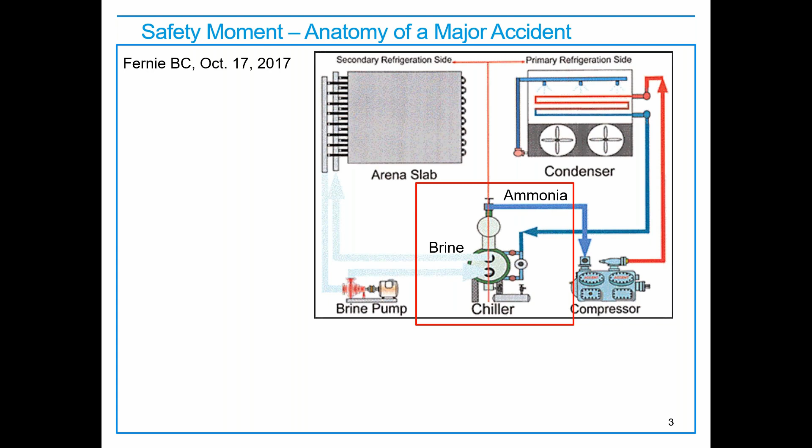So I wanted to start with a process safety moment, and I wanted to tackle this incident in particular that happened in BC in 2017 at a hockey arena. The incident happened in their chiller system, the system they use to cool the slab so the ice will stay and remain during the winter hockey season. Essentially what ended up happening was the tubes that contained the ammonia ended up leaking.

There was also a compromise in the brine tube, so the ammonia got into the brine. When they combined, it caused a bit of an overpressure, and then caused a much more significant release of ammonia into the mechanical maintenance room where the chiller system was located. There was enough ammonia that residents in the local area were smelling it and phoning police and fire departments. The arena did have an alarm for ammonia leaks in the maintenance room, and 3 arena workers did indeed go in and try to investigate the leak itself.

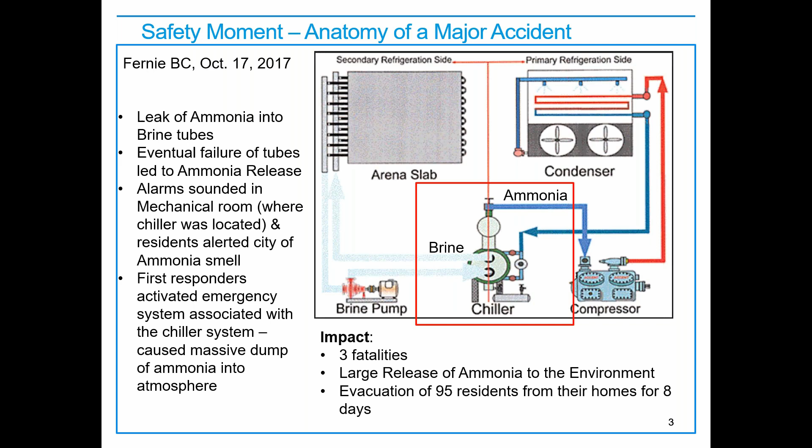First responders, when they arrived on site as a result of the phone calls from local residents, went into the mechanical room, quickly saw that there was a leak, and saw what looked like a press-here-in-case-of-emergency type button. They activated that button, and that actually led to worsening the situation — it dumped the rest of the ammonia out of the system and into the air. The net result of this incident was 3 fatalities. Unfortunately, the 3 arena workers who went in to respond to the alarm all succumbed. And there was so much ammonia in the environment that 95 residents had to be evacuated from their homes for 8 days. So very, very significant in terms of incident. But let's see what we can learn from it.

So the first thing I'm going to pull up here is just a visual of the Swiss cheese model — hopefully folks are somewhat familiar with it. Really, it just states that in order for a major accident like what we just witnessed at a facility to occur, it usually has to compromise multiple layers of protection. Some of those layers are technology barriers — protection systems, pipe thickness, your equipment and what condition it's in. Some are process barriers, such as how you go about maintaining and operating your assets. And some are people barriers — the knowledge, training, competency, and decision-making of the individuals in question. So let's examine this particular instance from that perspective.

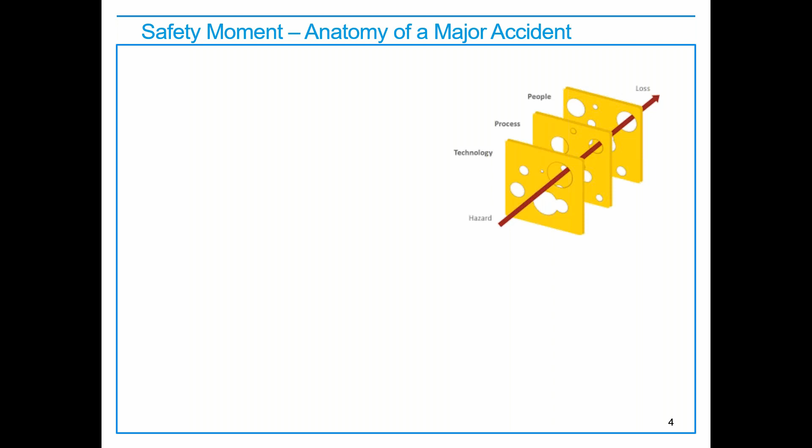So looking at it from a technology, plant and equipment standpoint, a few things came out in the investigation. The first thing was that right from day one, the design of the building's ventilation system was not adequate.

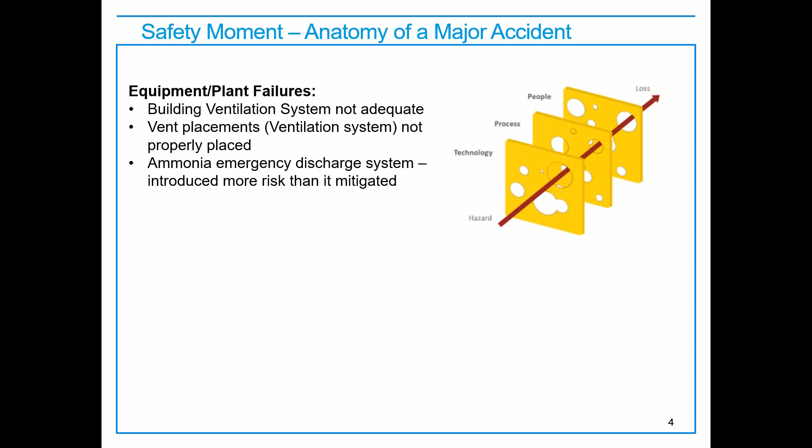So it would not have been able to expel adequate amounts of the ammonia in the case of a leak. The other unfortunate thing right at the design stage of the building was that the vent placements for the ventilation system were not appropriate. The vents that took air from inside the building and vented it out were right next to the intake, so the air would go out and then circulate right back into the building. In this case, the ammonia discharge system, the emergency system, actually did more to worsen the situation than to help contain or manage it.

From a process standpoint, the city had known that this chiller system was at its end of life. They'd been notified of that by maintenance contractors they brought in. They had actually gone in and allocated funding to replace the chillers, but that had been deferred a couple of times, and then it just simply stopped appearing in their long-range plans. It's not obvious why that came off or whether that was an oversight.

Secondly, there was no formal risk assessment process to support the decision making, either in terms of their capital planning and decisions to defer things, or in terms of the arena itself, which had identified the ammonia leak in the spring. They decided not to do anything about it, but to try to address it during major plant maintenance before the winter season started. They again identified that there was a leak and still chose to put the system in place. So again, decision-making challenges there.

And finally, lack of awareness and documentation of plant hazards. It was pretty clear that there weren't documented procedures for what to do in case of ammonia leaks, and the individuals working at the arena didn't necessarily recognize or understand the hazards associated with that and how to properly respond. So that leads to people failures - there was a lack of competency, training, and knowledge on the part of the people involved, and that led to poor decisions, both from an asset investment standpoint and from a return to service standpoint given the equipment's condition.

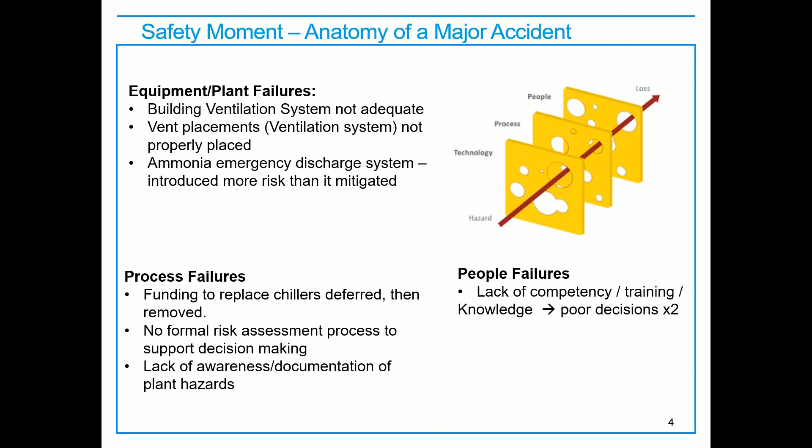So process safety - the reason we embark on these types of journeys and improvements is exactly to avoid these types of scenarios and circumstances that can unfortunately happen.

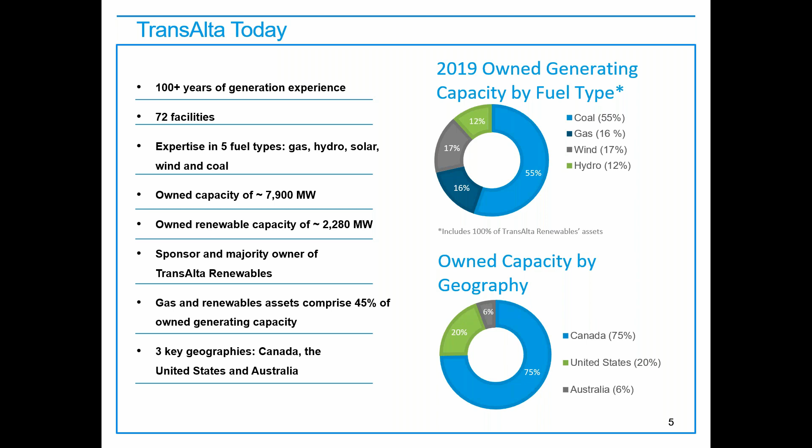So before I go into our journey, I wanted to introduce you a little bit to TransAlta to give you some context as to who we are. We are a power generation company - we have coal assets, gas assets, wind, hydro. Interesting thing to note, if you see that circle chart showing how much of our energy is produced by coal - we're in the process of converting all of that coal to gas, so we're undergoing some pretty significant changes as a business right now. Geographically, our presence is primarily in Canada, but we also have a presence in the United States and in Western Australia.

So I wanted to start out with what's our impetus for change. Very rarely do people go on a journey unless there's some driver, some motivation to do it. And I find it interesting now looking back that our impetus for change, or what my driver was working in the business to try and make something different, was actually our desire as an organization to grow. In order to grow, we needed to improve our cash to support the growth - we needed cash to balance our books, our financials, reset our debt to earnings ratio so we could get better financing, and we physically wanted to get more money from our assets in order to reinvest that in growth as well, so we wouldn't have to finance everything.

The challenges were that we had unpredictable cash from our generation business. We had unplanned equipment failures that were resulting in unbudgeted spend, continually reassessing what we were going to do in the year now that we have these unplanned events - how are we going to manage it within our budgets?

Our costs in general, we knew that they weren't in line with benchmarking. So it's interesting, I was obviously a bit naive at the time, not recognizing that some of these unplanned equipment failures actually had a parallel with process safety. But this was really the main driver. And so we went out looking for solutions that would help address some of these challenges we had as a business. And we came across a company called Scottish Power.

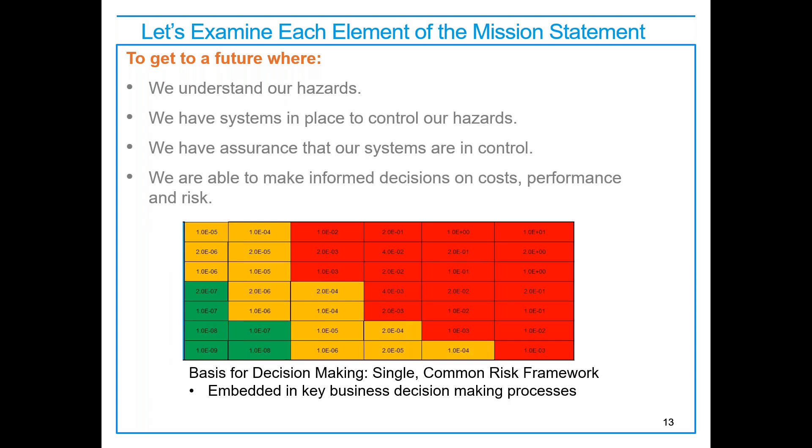So this program wasn't small. Once we did our audit, we ended up coming up with about 26 areas that we felt we needed to make improvements. We implemented this across our entire business. And just to give you a sense of some of the types of work we actually drove, I haven't listed them all here, but I'll share just a few.

So I've mentioned this a few times. We did take and expand our management system and move to an integrated management system.

We did do bow ties, so we developed bow ties for each of our facilities. We developed 62 engineering standards. It's not to say we didn't have engineering standards before, we did, but as a result of having the bow ties, we were able to identify which systems were our protection systems and go back and make sure our standards covered those and set the minimum expectations for how we're going to maintain and operate those. So we went through and redeveloped and released those.

We implemented an asset criticality system so we could understand what equipment we had in our plant and what kind of impact that equipment had on our business. If you had a process safety impact, environmental impact, maybe it had no impact to those, but was very impactful in terms of heat rate, so plant efficiency or availability.

For those assets that we identified as high criticality, so the ones that had a process safety implication, primarily protection systems, we went in and did maintenance strategies for them. So we reassessed the maintenance program that we had to make sure they were in fact meeting or exceeding the minimum that we'd articulated in our engineering standards.

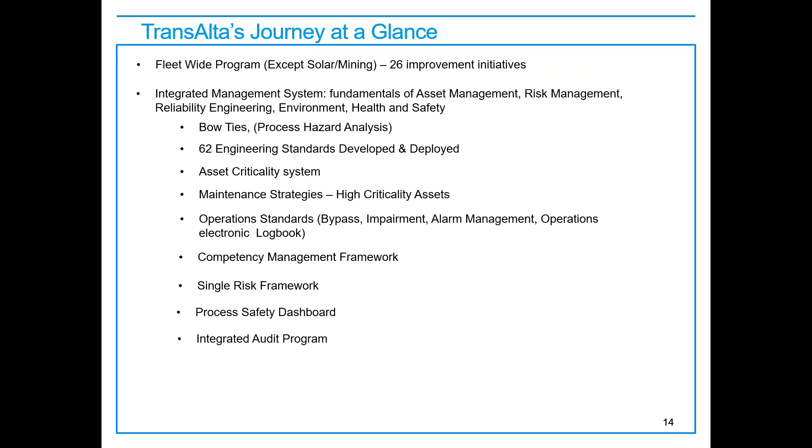So has it been worth it? Hopefully you can get a sense of the scope and the breadth of the program that we put into place. It was a lot of effort, and it definitely required some investment, not just in terms of time and energy, but also in terms of money.

So let me share with you some of the benefits we've seen now that we're a couple of years out and into sustainment and continuous improvement. Our TIF, total injury frequency, has dropped 67%. Now, in honor of transparency, I want everyone to realize that not all of our TIF incidents were process safety incidents. And also in the last 2 years, year and a half, we've also significantly expanded our behavioral safety program. So I can't say this 67% reduction was solely based on the process safety program we put into place, but it definitely had an impact.

In terms of that unreliable equipment I was talking about before, our incidents that resulted in a loss, so a business impact, like financial impact, reduced by 66%. Our environmental incidents reduced by 30%, and our regulatory incidents reduced by 41%.

So some pretty, it gives me kind of goosebumps. I like looking at these slides, but it just goes to show that, yes, the journey will get you there and it will improve your process safety, but it also helps to improve your business. And in my opinion, looking at those stats, yeah, it was worth it.

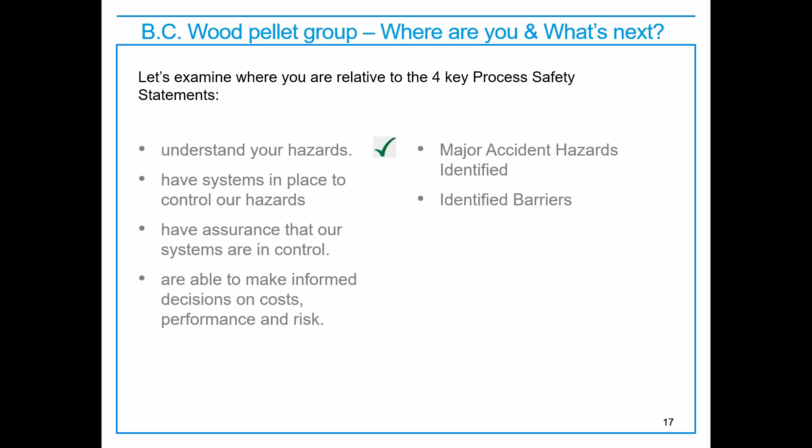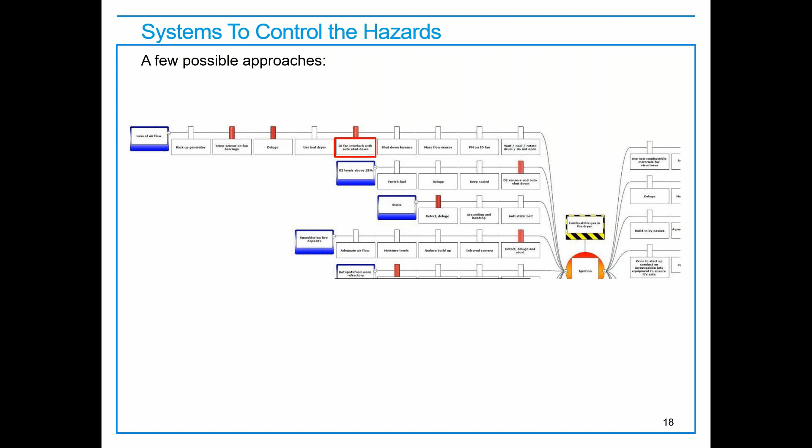There's a couple different ways you could go about tackling it, and I've seen different companies tackle implementation of the bow ties. One is to take a very discrete approach to managing the barriers. That's to say, okay, we've identified that we have to have specifically an ID fan interlock with an auto shutdown. Now that's a requirement, and we're going to test for that in all of the facilities - it has to be in place, and we have to understand how it's being maintained, what maintenance is against that, to make sure it functions as intended when called upon.

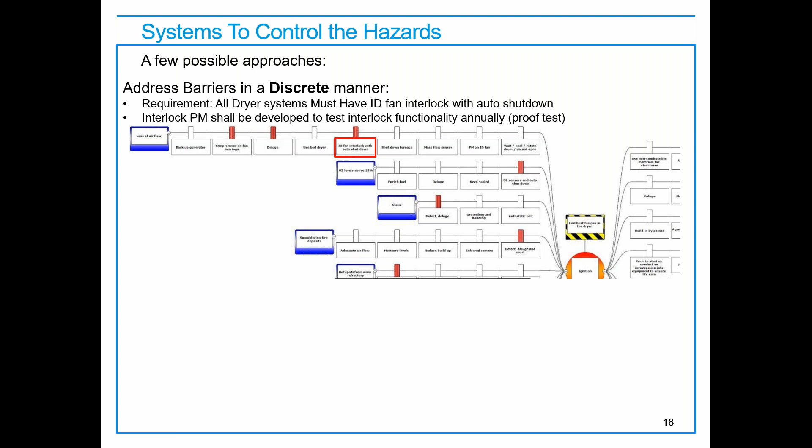Proof testing, essentially - proof testing and maintenance. So that's a very discrete approach, and certainly there are companies that have gone in and said, yeah, we've identified the very specific barrier and we're going to manage to that.

TransAlta took a slightly different approach - we went with more of a programmatic approach. We went in and said, okay, yes, there's a barrier. In this case it's ID fan, but we would have said, okay, that's a protection system. We need to stand up a program to address all of our protection systems, and we need a program to help us identify what systems are protection systems, as opposed to going bow tie by bow tie, line by line, and identifying that explicitly. So we took that approach and methodology, then drafted standards for how we're going to manage each of those barriers, and drove fleet-wide implementation programs so we'd have one way of addressing those types of barriers across our entire business.

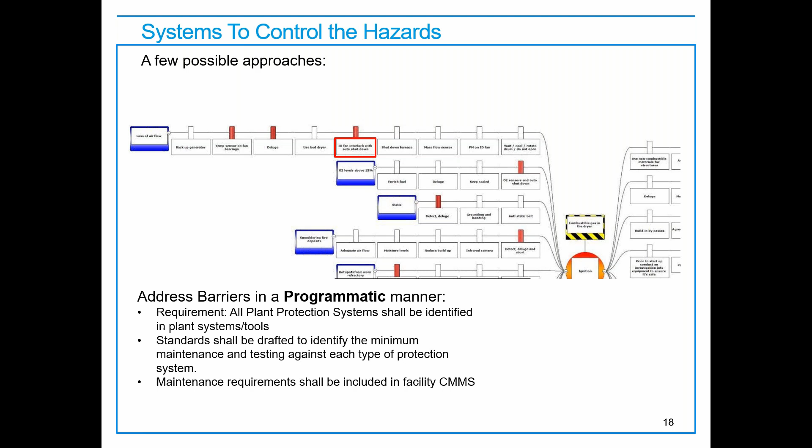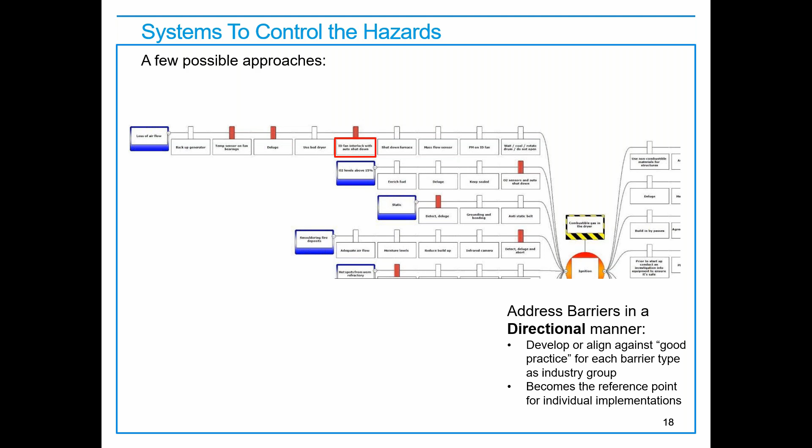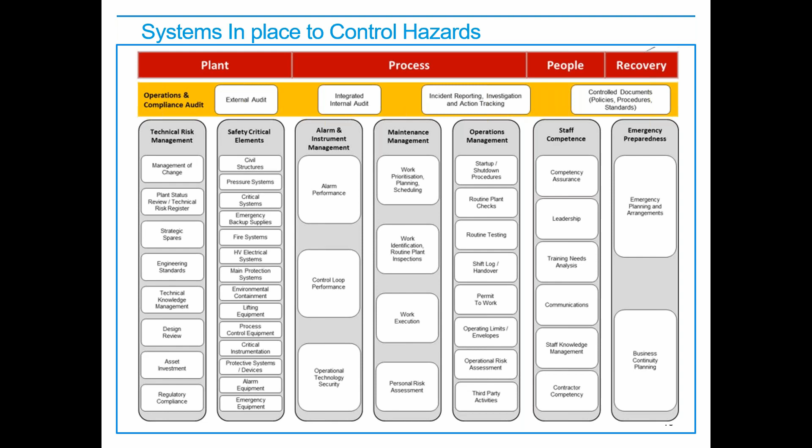Again, TransAlta, we chose to go with more of a programmatic approach. Just thinking in terms of you guys being an industry group, that more directional approach might be a bit easier and more palatable. So I took a cut at trying to talk about a little bit of the pros and cons for each of the different approaches, because there are pros and cons to each one.

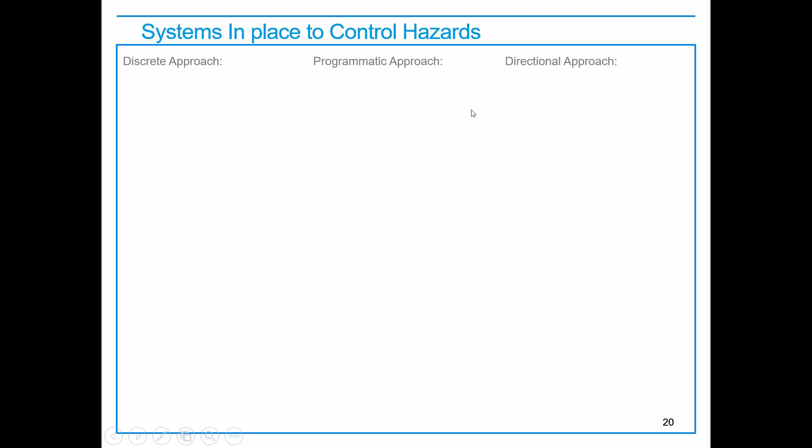With the discrete approach, you go in and identify each individual barrier and figure out exactly what the requirements will be for that specific barrier. It becomes very easy to identify, as a business or plant, what your risk is of having that specific major accident hazard. For high risk, high hazard industries, like chemical or oil and gas, it can be very important to specifically and discretely identify the barrier, what's expected, and how it's being managed, as opposed to taking a more programmatic approach.

Downsides are that you're focusing efforts on just those specific barriers, so you don't get an opportunity to address broader equipment or process issues. Sometimes the benefits are more localized and specific to avoiding process safety incidents. It's a higher level of effort to implement, develop, and sustain. This was actually the path we thought we were going to take originally when we first set out on the program, and we ended up revising our course to go with more of a programmatic approach.

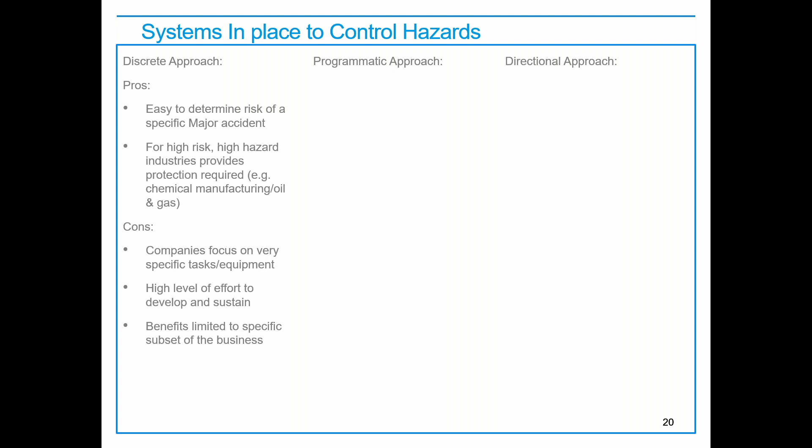The programmatic approach takes a little less effort to develop. It's easier to chunk the work into individual projects or improvement areas, especially at a company level, because you can develop standards for those barrier types, and then stand up projects to implement them across a facility, plant, or even a fleet. It does help address issues that go slightly beyond just that process safety benefit. Cons: for really high risk industries, I don't think this would be adequate.

Unless you audit the bow ties themselves when you go to the plants, it's very hard to say this is the specific major accident and this is the specific risk of having that major accident in question. You can talk about your program, your overall risk of process safety incidents, and the quality of your barriers and thus the likelihood of having them, but you can't zone in on that individual major accident hazard in question.

In terms of the directional approach, some of the pros: I think personally it's probably easier from an industry group or for companies that have challenges getting everyone to move in the same direction at the same time. There's decentralized control, so it's definitely probably an easier approach to take.

The other advantage is there's already a lot of good practices articulated in ISO standards and other places, so it's not that difficult to identify what good looks like. It enables each company to manage their own implementation, but still create a community group where you've identified those good practices, where you can come together and help each other out through the journey and learn from each other.

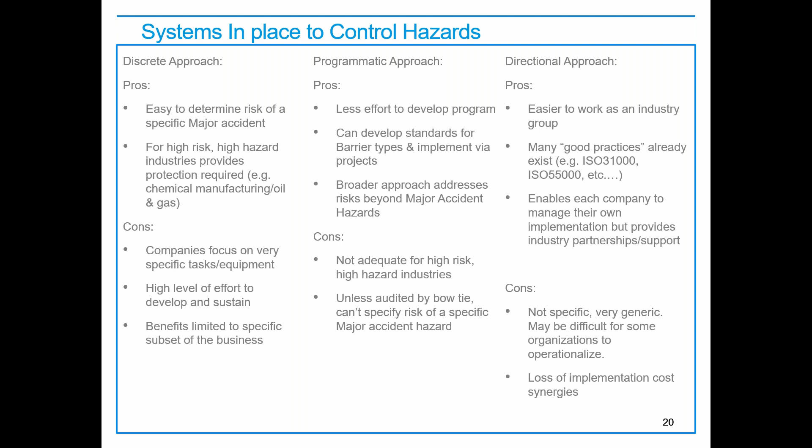So moving on, continuing to examine the mission statement.

If we look at the next statement, assurance that our systems are in control, let's talk through that a little bit. So I've got a bit of a cartoon here. I'll just pause and give everyone a quick second to read that.

Hopefully what you've got from that is one group saying, look at these fantastic benefits we've got, and someone else saying, yeah, but what I really cared about was EBITDA — what was the impact on EBITDA, right? So if you don't measure it, it doesn't get managed. I think the same is very true with programs and implementations. Measurement becomes very important.

The other thing in terms of providing assurance is I believe there needs to be governance in place — entropy is the natural state. Within TransAlta we've had many programs in our history where we did a great job on implementation but didn't invest enough time, energy, and effort into sustainment. As a result, over a couple of years those programs fell apart and we lost the benefit. We didn't sustain the benefits we'd brought back into the business, and the same is true with the process safety program.

You can put all your time into planning and doing the work, but if you don't think about how you're going to check your performance and act accordingly to drive continuous improvement, you won't sustain the value. You'll put in a big investment of time and energy and not maintain that over time. Regardless of approach, you need some structure in terms of governance, some forms of measurement, and a formal governance body to sustain and continuously improve these programs.

We've got things like management of change, so some KPIs to try and indicate how well our management of change is working, those types of things.

We've got another area that's alarm management - around number of alarms, number of nuisance alarms, number of alarms per shift per operator, that kind of thing, those types of KPIs.

And then under document and records control and compliance and audit, we've got things like our operating procedures - are those document reviews on track, or are they falling behind? Staff competence - are people on top of their training plans and competency assessments? So those are the types of KPIs that we have stood up.